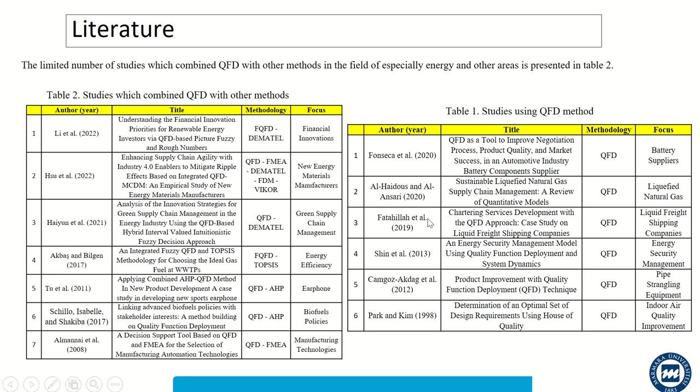Our motivation in this study: the evaluation process has been investigated for the technical features considered in smart meter procurement. This study aims to perform a systematic ranking and selection of the best smart gas meter alternatives, meeting the necessity of distribution system operators as per the determined criteria mentioned above. The aim of the paper is to determine the criteria for a special smart gas meter by using quality function deployment technique for the natural gas sector in Turkey.

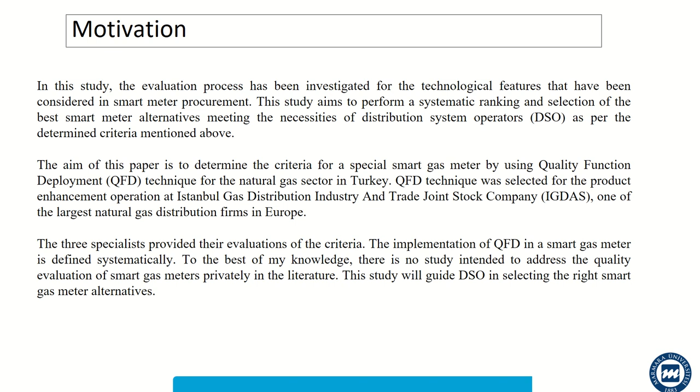QFD technique was selected for the product enhancement operation in IGDAŞ, and three specialists provided their evaluations of the criteria. The implementation of QFD in smart gas meters is defined systematically. To the best of my knowledge, there is no study about smart gas meters in the literature.

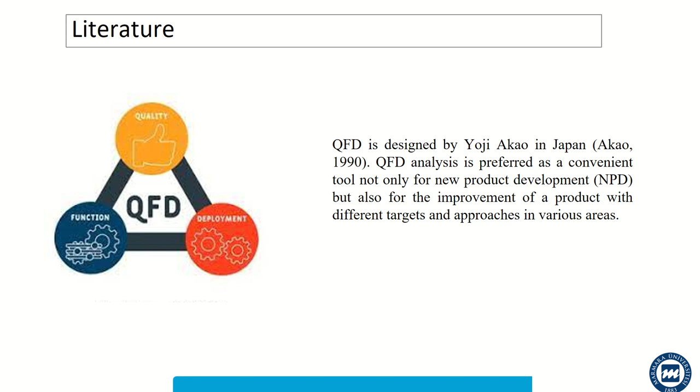As you see, QFD was designed by Yoji Akao in Japan. QFD analysis is preferred as a convenient tool not only for new product development, but also for the improvement of a product with different targets and approaches in various areas.

Within the scope of the project carried out in İGDAŞ, the QFD methodology was chosen to determine the product features to be preferred. Experts were selected to improve smart gas meters thanks to QFD. Smart gas meters are used in households to measure gas flow and to manage some operations.

The implementation of QFD to the smart gas meter is explained step by step as follows. Step 1: user prospects were specified by questionnaires by quality control, R&D, and field personnel. User expectations are rated out of 9.

Step 2: technical requirements relevant to user expectations are specified and stated. Technical requirements for QFD analysis are significant, as experts take these requirements into account to meet user expectations.

The technical requirements described in this work are measurement accuracy, abnormality detection rate, lifetime, assembly and preparation time, cost, failure rate per batch, lifetime, MID, CE, EMC compliance, IP, and the measurement capability for 30% hydrogen blending.

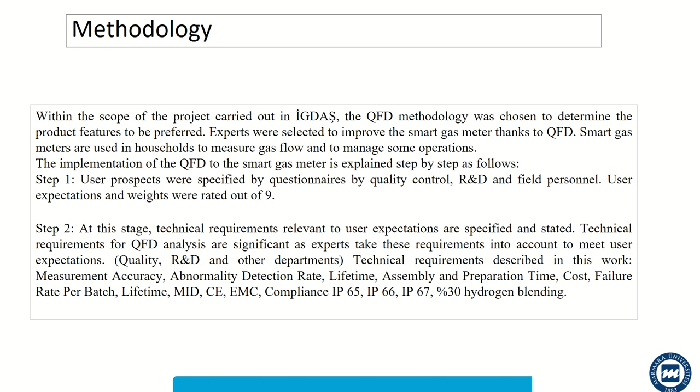Step 3: within the scope of the study, after specifying the technical requirements, the experts established the relationships between user expectations and technical requirements.

Significance and direction of improvement are other important issues in QFD analysis. As you see in table 3, interrelations between customer expectations and technical requirements are evaluated with 9, 3, and 1, representing strong, moderate, and weak relationships respectively.

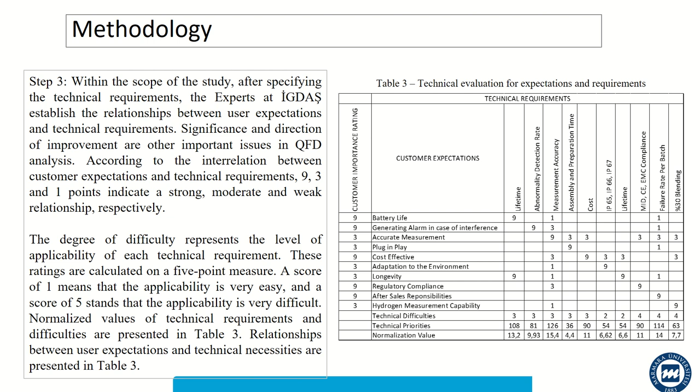The degree of difficulty represents the level of applicability of each technical requirement, and at the end of the table, relationships between user expectations and technical necessities are presented. Also, the technical priorities and normalization values are calculated in the study.

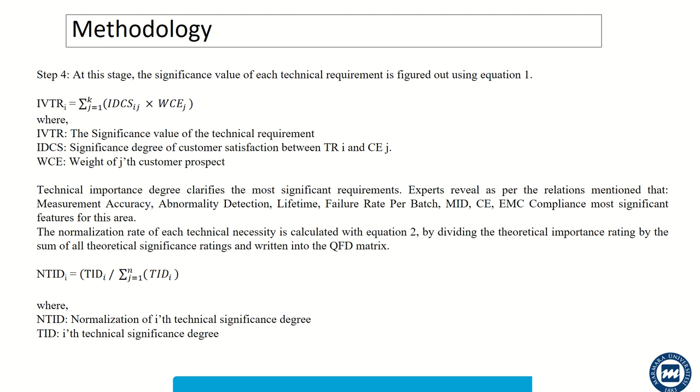Step 4: the significance value of each technical requirement is figured out using equation 1, and the normalization rate of each technical necessity is calculated with equation 2, as shown on the screen. Step 5: correlations among technical relevances are defined.

As you can see, some customer expectations and technical requirements have positive and strong relationships, but others have negative interrelationships, and some have none at all. There is no relationship between some customer expectations and technical requirements.

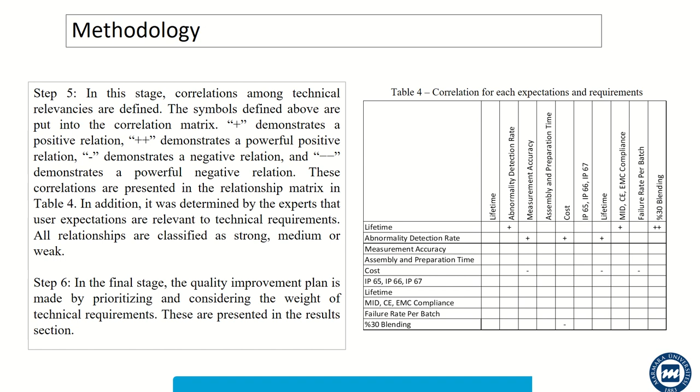What are the results? It has been determined that elimination of any measurement errors is the most important technical requirement, and it remains at the forefront for the following process.

One of the most important results of this study is related to failure rate per batch, which has 114 points in weight importance. It is revealed that failure rate per batch is the second most important issue.

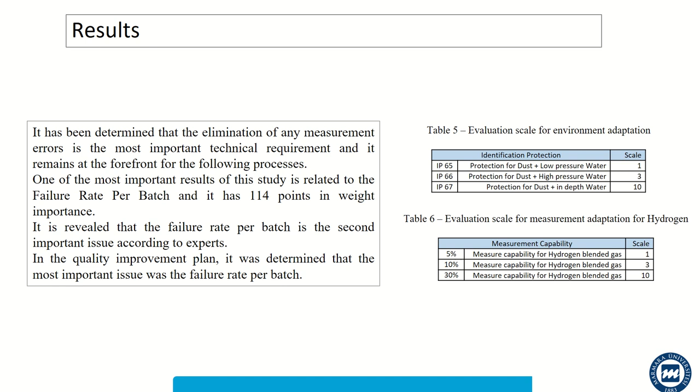According to experts in the quality improvement plan, it was determined that the most important issue was the failure rate per batch. MID, CE, EMC compliance and cost criteria are other significant features found as important technical requirements.

The scores of these two features are 90, after measurement accuracy and failure rate per batch. Therefore, the cost of technical requirements should be considered. In other words, cost is another competitive area for the product.

Abnormality detection rate must be considered to determine the next improvement area, because of its 81 points in importance weight. Thus, the alarms generated by smart gas meters are another important issue for gas distribution companies.

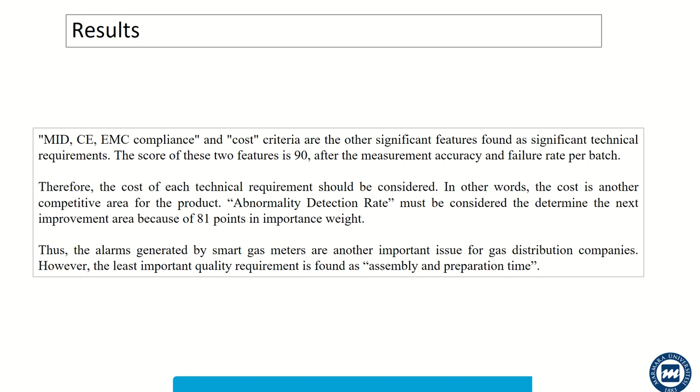However, the least important quality requirement is found to be assembly and preparation time.

What are the further studies? It has been determined that fuzzy QFD can be done in order to bring further levels of study. The results of this study have been a guide to gas distribution companies about what should be considered in the determination of technical requirements before procurement.

These proposed studies will ensure regular improvement of existing smart gas meters, and will contribute to the coordination of integration and compatible information for the process of smart gas meters.